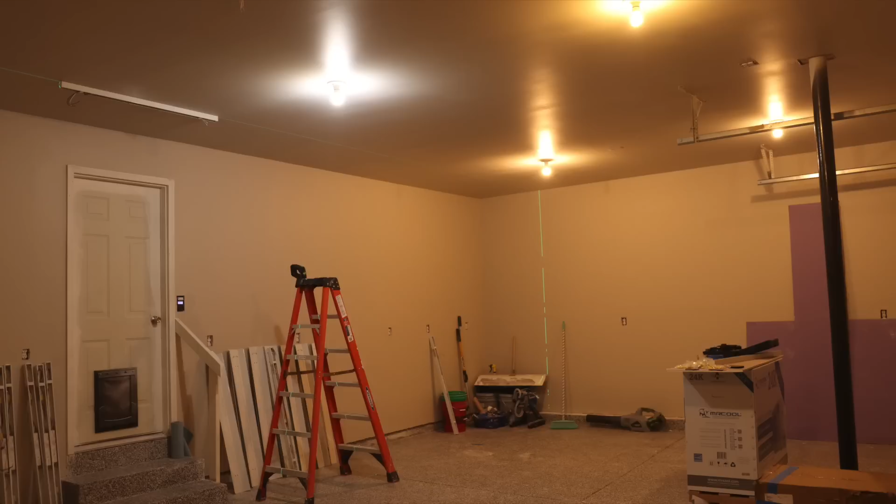This is my shop before installing American Green Lights, and this is my shop after. So why American Green Lights? In my honest opinion, based on every other light that I've ever seen, every other shop I've ever been in, nothing compares to the light that these lights give off. It's almost strange to even describe to somebody. And it is always one of the key talking points for anybody that ever comes over to my shop. And it was always one of the key talking points for any shop that I ever went to that had American Green Lights. So what is so great about them?

The thing that's so great about American Green Lights and why I chose to use them in not only this shop, but the previous shop, is that it has a high CRI. And CRI stands for Color Rendering Index. The CRI on these lights is a 95. So I'm not gonna pretend to start talking about the science and explain all of that. If you wanna find out a bunch of really good information, you can actually go to americangreenlights.com and read all about it. There's all kinds of great articles discussing the difference between lumens, between foot candles, what the CRI actually means. But for me, why it's important is because the color rendering of these lights is really, really great for somebody that films on a daily basis.

Now, where it has become the biggest advantage for me is not only the filming, but also the woodworking, and I'll talk about that in a moment. But for me, having the ability to come in my shop, I set up my camera one time, and I never have to mess with the settings again. I never have to color correct anything. I just shoot my video, and it's done. Why? Because the color in this shop is always so consistent every time I come out here. As soon as I dial in the settings on my camera, I never have to worry about it again.

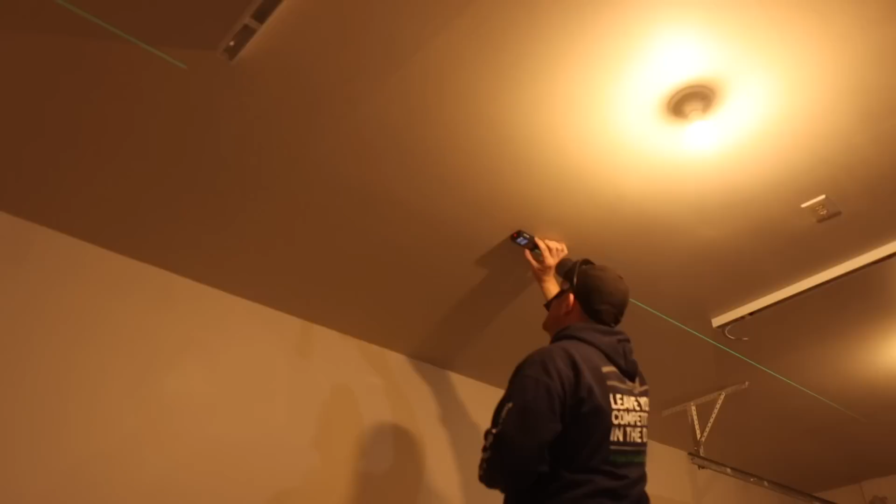If we go back and look at the shop prior to me putting in the lights, you can see the amberness and just the poor lighting and the poor coverage, and what a massive difference it was from that to installing the lights and what you see here.

Now, I mentioned why this is beneficial for woodworking. Not only do I have perfect even coverage everywhere through my shop, I'm able to see everything that I'm doing, and it gives me an accurate representation of what I'm working on. And where that becomes very important is a couple of different aspects to woodworking. Let's say that I'm trying to take 7 different boards and I'm trying to make sure that the colors match as best as possible for whatever project. I'm able to see that more clearly in that clear light because it's giving me an accurate representation of what it is that I'm actually looking at.

Where it also comes into play is it's really gonna help you see inconsistencies or mistakes that you make when maybe finishing or something like that. Now, to go further with the finishing, it could be very useful to, let's say you're trying to match a certain color. Having that clear picture is really gonna help with that process.

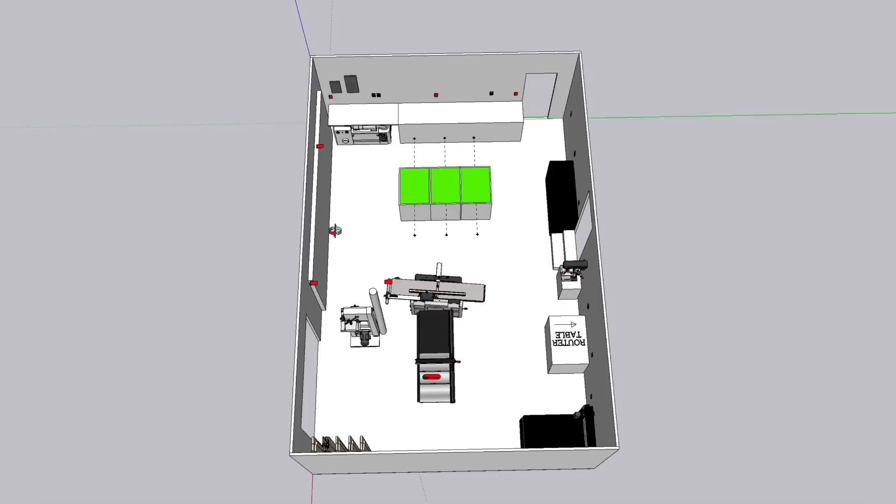So the way that this works, you take a sketch of your shop, right? It can be a sketch on a napkin. It can be a quick rough sketch on a piece of paper. You can go in PowerPoint and just plot boxes, or you can go one step further and provide a SketchUp model even to Jim over at American Green Lights. What he does is he then takes that model and imports it into his software, which will give a rendering of your shop.

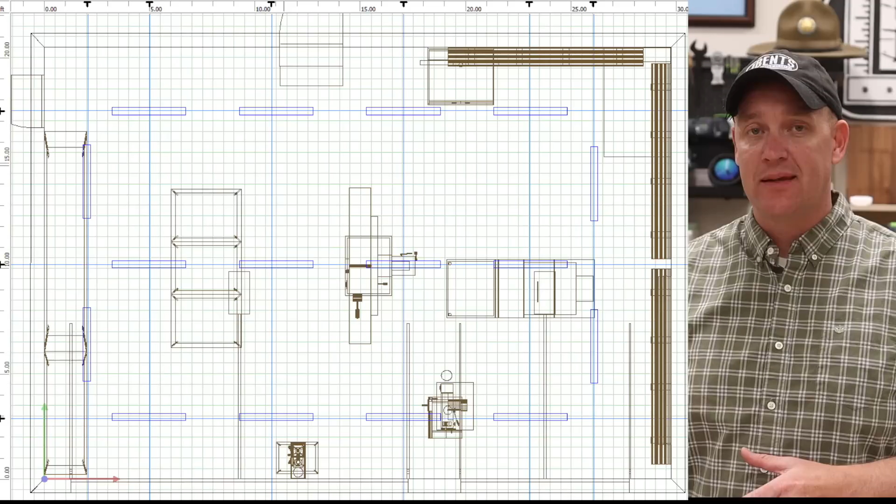From there, it will generate the best light package, and when it generates that best light package, it's also going to show you just how much lighting coverage and exactly where that lighting coverage is going to be, to the point of how many foot candles are going to be on each one of your surfaces.

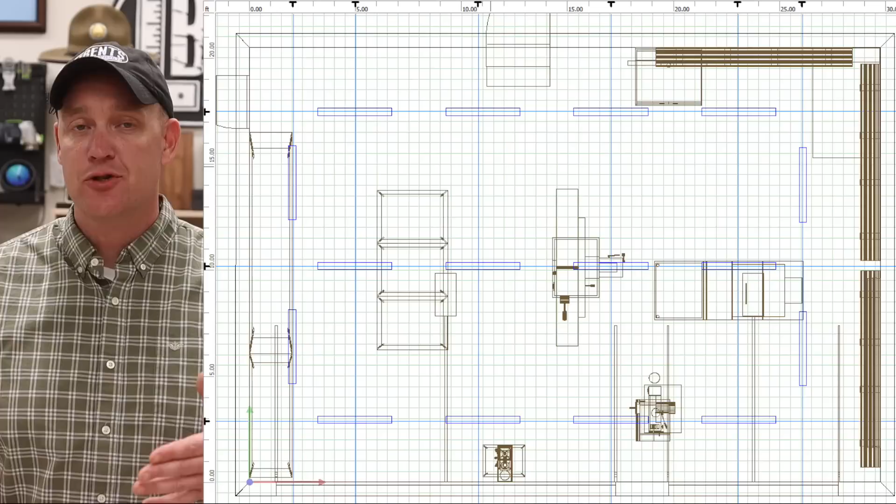Now, once you get this whole package back, it'll tell you exactly how many lights you need, and at that point, should you choose to order some of the lights, they will be sent to you. And then here's the great part: that documentation is what makes the install so easy, because you don't have to guess where you're supposed to put things, because this document actually shows you by foot where each one of these lights is supposed to go.

Now, a little bit on the lighting package that I'm using in my shop. It is 16 total lights. They are 4-foot, 48 watt LEDs. And when I say 48 watt, it means that there's 2 LED strips in them. In my previous shop, I want to say I had 22 or 24 lights, but they were all 24 watt. So since I'm using the 48 watt in this shop, we just needed a few less lights.

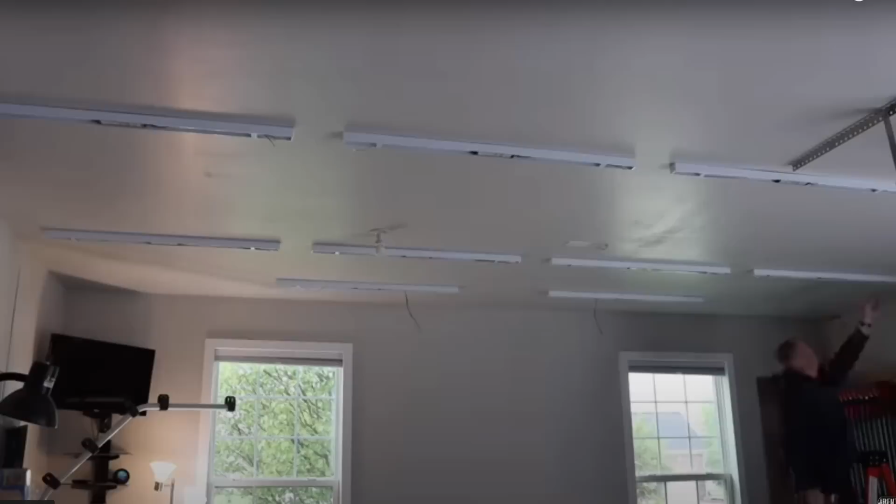I am not actually going to be doing a very detailed install video, as I already have one of those from the previous shop series, and I'll leave a link to that video down in the video description. However, since I have installed these in 2 different shops now, I did want to share a few tips and tricks that will make the install of your lights a lot easier.

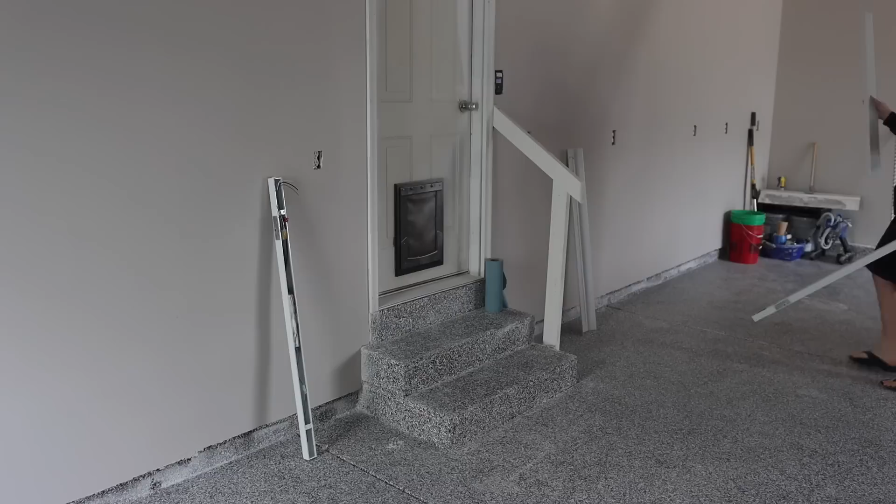Now, when you get these lights, in each box, there's going to be 2 pieces. You're going to have the LED driver, which is going to be the first piece that gets hung on the ceiling, and then you have the actual LEDs themselves. What I like to do is open up all of the packages and then separate my drivers from the lights, and that way I can just start installing one thing at a time. What I have found is doing one task all the way through and then going back and starting the next task is the best thing in a process like this.

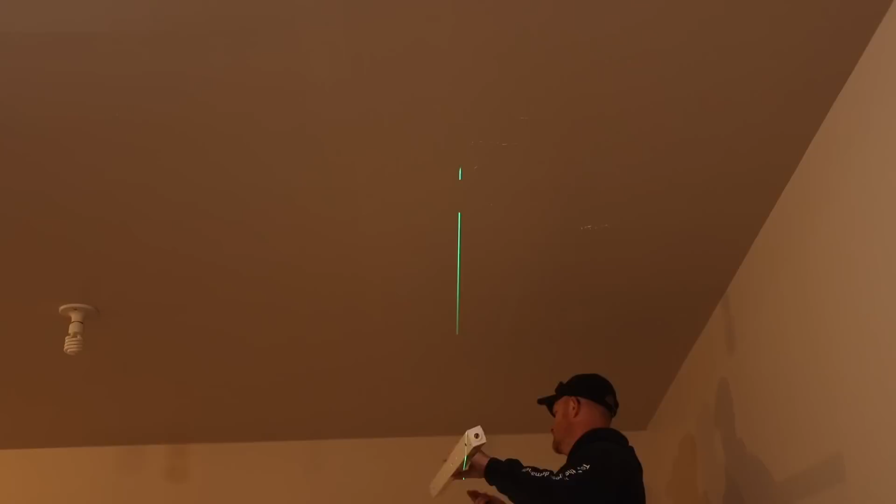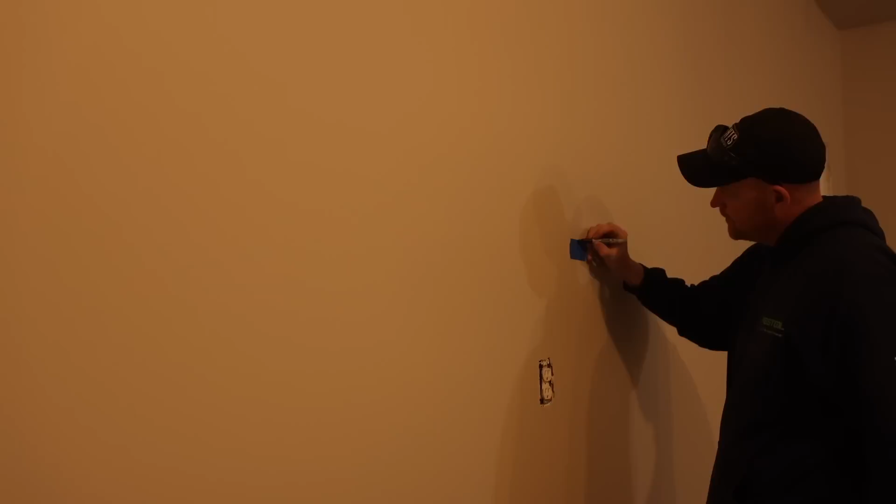And the first thing that you're going to do is install these LED drivers. And one thing that I cannot recommend enough is having a laser level for this process. Why a laser level is so beneficial is because I can measure on both ends of the room however far out that light row needs to be, and then I can use my laser level to line all of that up. So then all I'm doing is following a laser to ensure that my lights stay in a straight line. The only thing you have to do from there is figure out the spacing between the lights, which if you follow the schematic that is sent to you, it's very easy because it's given to you.

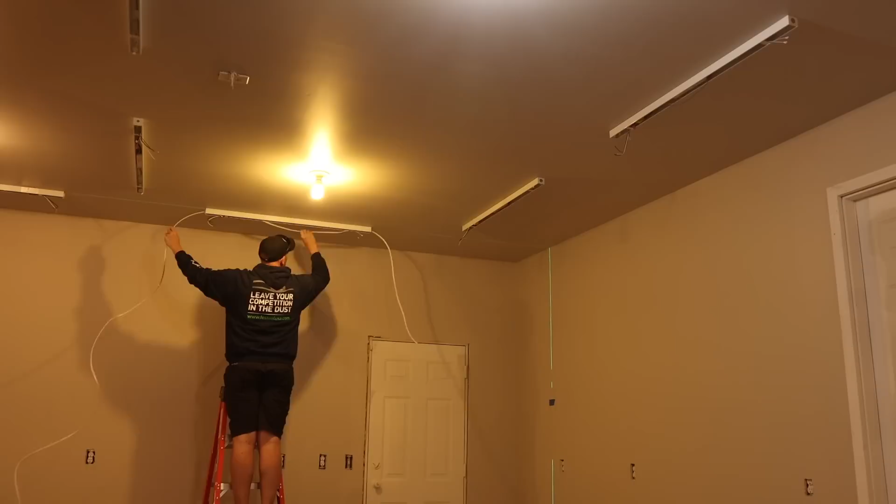Now, once all of the drivers are installed, the next thing to do is start focusing on the wiring. And the way that I did the wiring on mine, and I am so glad that I did it this way because it made everything very easy, is I actually took the Romex and unraveled it and then fed it through every single light, which did take a little bit of time because obviously it's bendable, but it starts to get caught on things. So you just take your time and you run it through every single one of the lights all the way around the room.

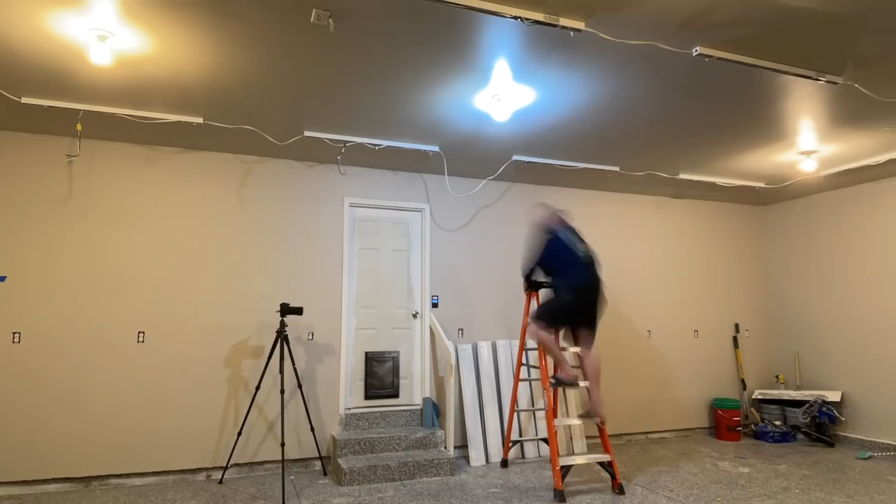And then the other recommendation is that you leave enough slack in each one to give you a little bit of wiggle room. You don't want to have that cable super tight all the way around, because when you go to cut those wires and you pull everything together and you wire everything, it can get a little bit tight. So you want to leave a little bit of play, basically to allow yourself enough cable to actually make the connections.

Now for this, I started all the way at what I knew my last light was going to be and worked my way back to the very first light. At this point, no power of any sort is hooked up to this line. Now the wiring on these is very, very simple and straightforward. Each one of the lights is connected to each other.

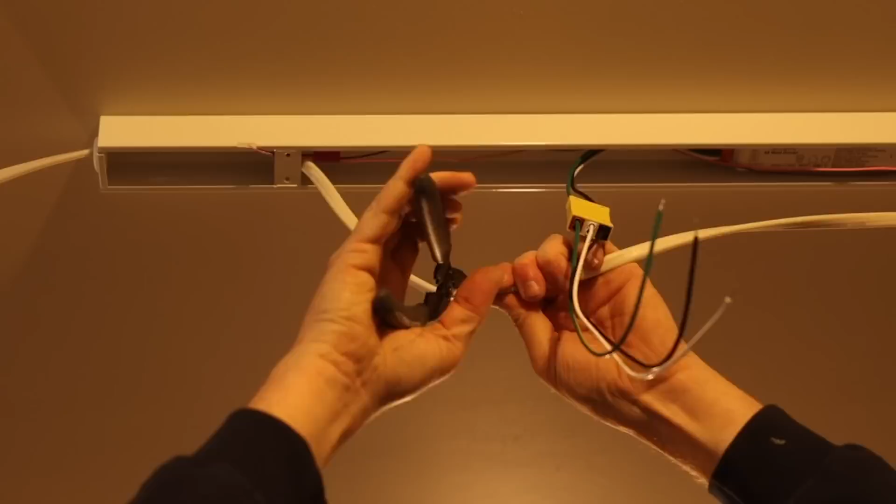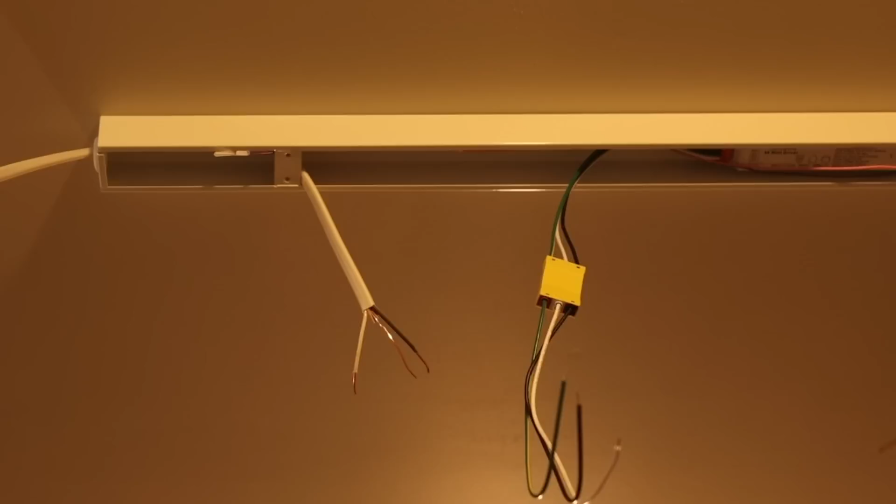And the way that this is accomplished is when I pull down the white Romex and I cut it in half, I now have a line coming from the previous light. I now have a line that's going to go to the next light, and both of those lines are going to get connected to the lines for the light. So every light, with the exception of the first and the last, is going to have 3 lines into it. One for the light before, one for the light after, and the actual light that you're working on.

Now, once all the electrical is done, then you can actually go through and install the light itself. Now, the light is very easy to install because it just has one little plug connection that fits to the LED driver, and then there's simply 2 screws that screw that light into the actual driver. Once all those are installed, you can now wire this for power.

Now, what I did for my shop is I had 6 lights that were already on a switch for the house. So I took the closest light to the first light in my line and ran a cable from that to the wiring on the existing light. I removed the existing light and wired that line into the existing line. So what this did for me is that now, every time I flip that switch, it's operating the previous lights, but they're wired to my new lights. For the other 5, I simply removed the bulbs and left everything in place.

Then once I had everything wired, it was time to go ahead and turn that breaker back on, flip on the light, and see what the result was. I mean, in all honesty, I don't really need to say much else about these lights. The proof is there. You're visually seeing it. There's no modifications to the camera. It is just the settings, and actually filming this video kind of sucked because the lighting was so bad while I was filming it because I was using the lights that were in the shop. Well, now, as you can see, that's obviously not the case anymore.